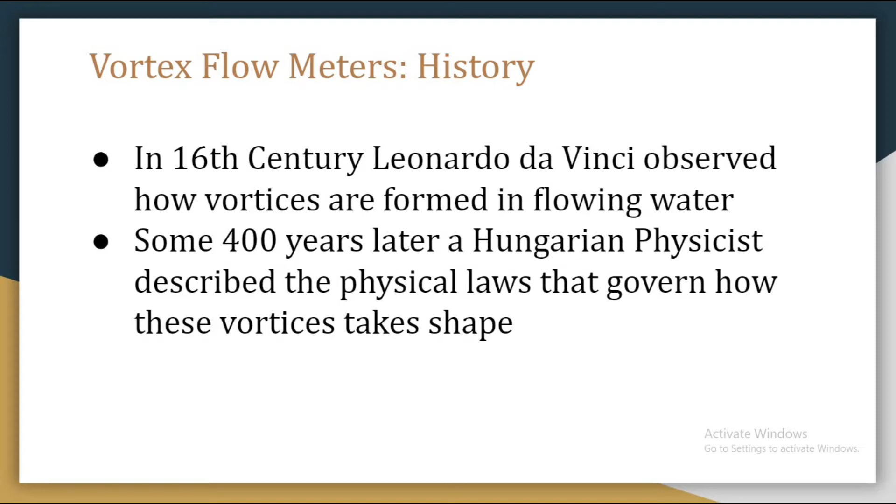Now let me discuss the very important part of this lecture, which is the working of vortex flow meters, right? Inside every vortex flow meter, there are bluff bodies located in the middle of the pipe. This body is a kind of obstruction that disturbs the flow. Okay? At first, let me show you the bluff body in the diagram.

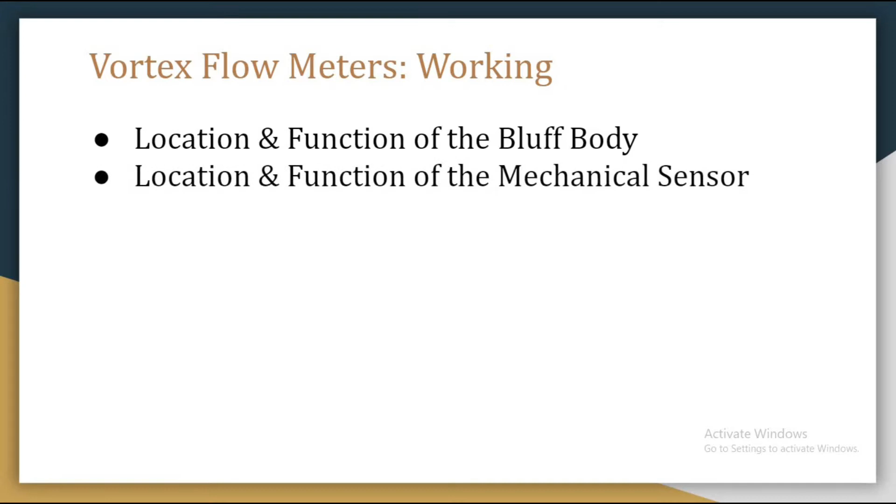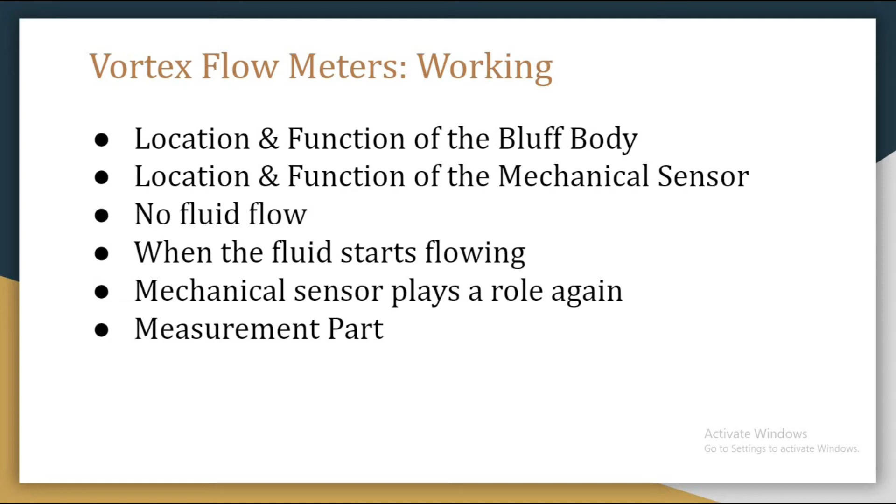We got the distance. Now, therefore, the total volumetric flow rate can be measured by counting the number of vortices that pass. Okay, the higher the flow velocity, the higher the measured frequency of the vortices. Now we have to be familiar with the problem encountered here and the solution proposed to mitigate this problem. The problem encountered is that in some applications the velocity is too low for perceptible vortices to form.

Okay, now we have to look for the enhancement in functionality. Functionality can be enhanced by incorporating an optional temperature measurement into the sensor.

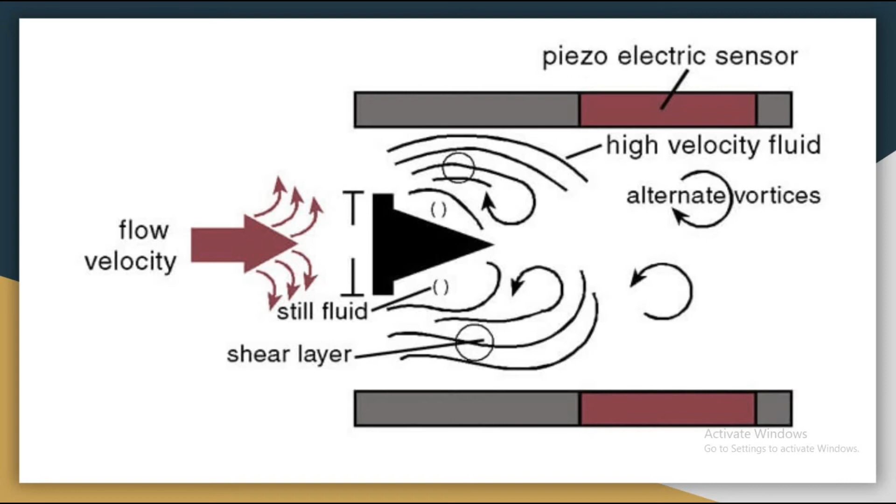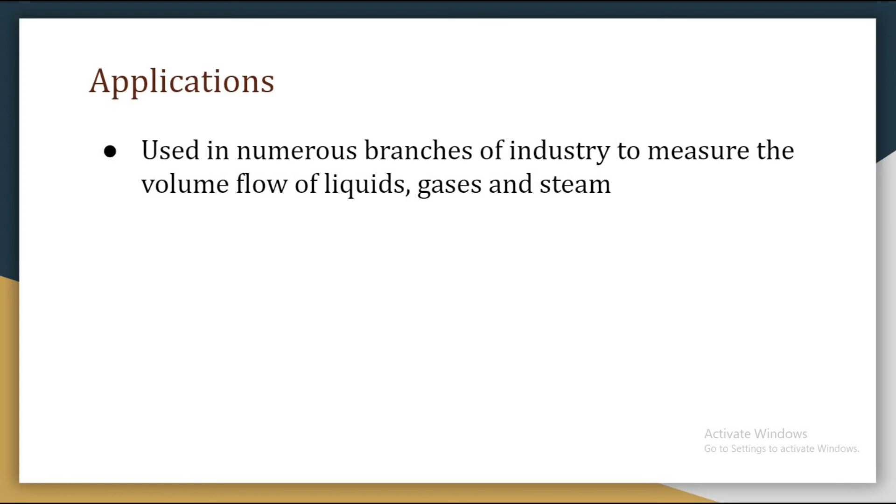So let us proceed towards the applications. Vortex flow meters are used in numerous branches of industry to measure the volume flow of liquids, gases and steam. Okay, it is used in chemical and petrochemical industries as well, and in power generation and heat supply systems.

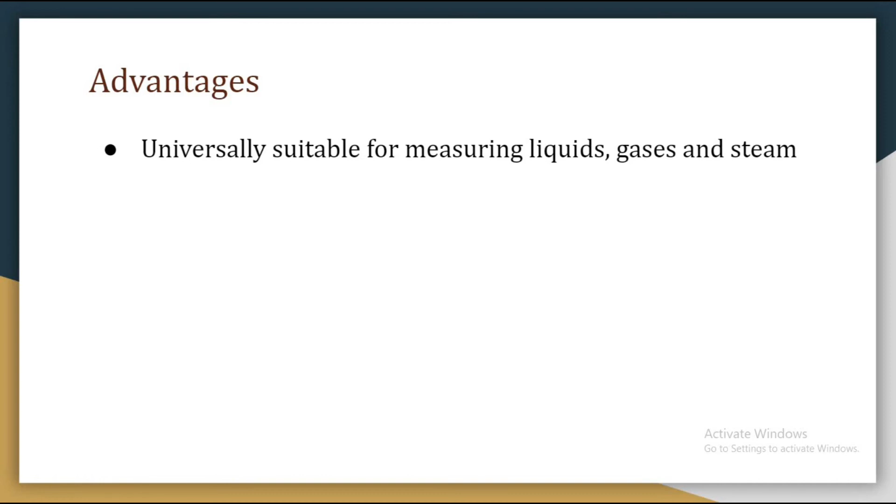Let us go through the advantages of the vortex flow meter quickly. It is universally suitable for measuring liquids, gases and steam, as I said. It is largely unaffected by changes in pressure, density, temperature and viscosity. Very important point. It has long-term stability and a wide temperature range, from -200 degrees C to +400 degrees C. It has a wide range of sizes and, obviously, linear output.

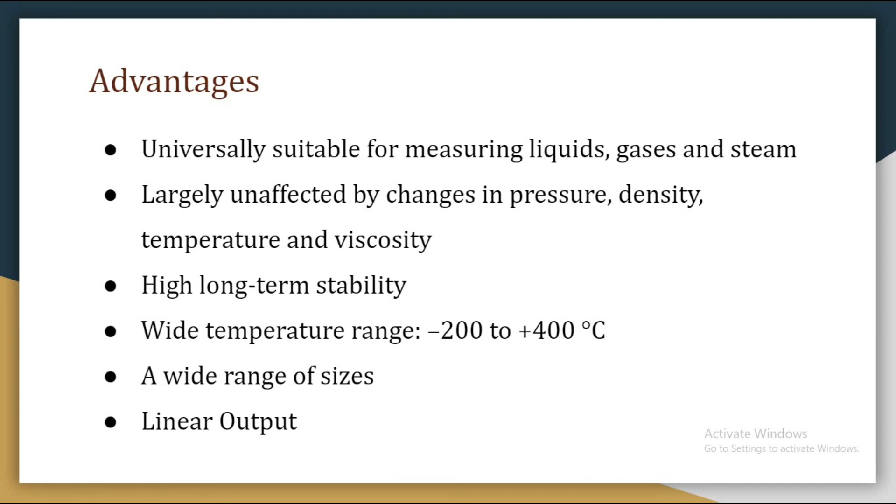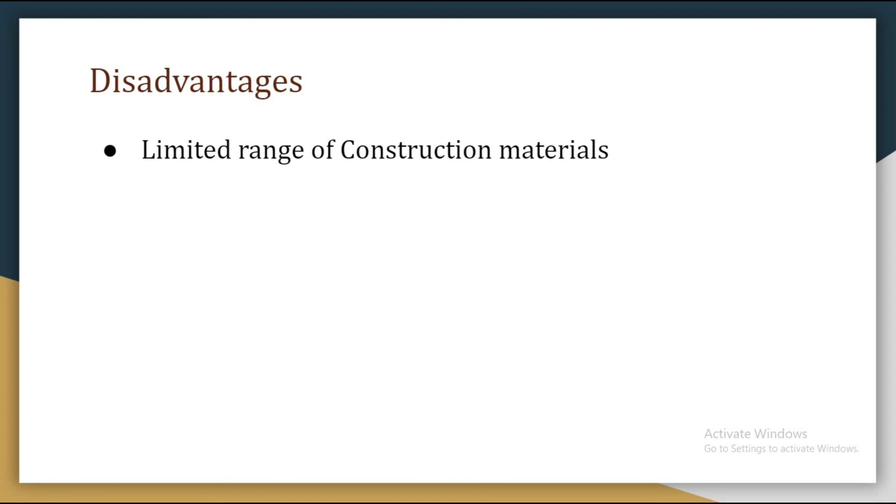Let us quickly go through the disadvantages. It has a limited range of construction materials. We cannot make a vortex flow meter from all materials. Okay, we have to be very choosy about the materials with which we construct our vortex flow meter. A vortex flow meter is not suitable for slurries or high viscosity liquids.

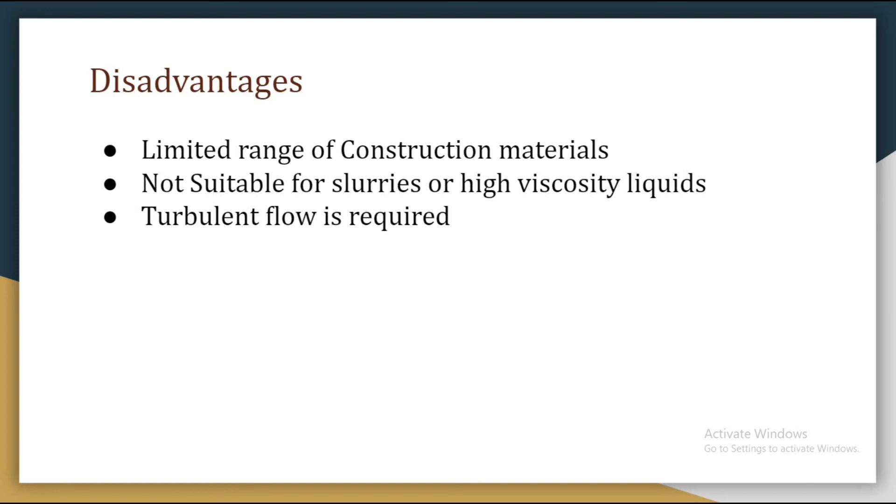I hope you guys remember that the electromagnetic flow meter was suitable for slurries, right? In an electromagnetic flow meter, it didn't matter if the flow was laminar or turbulent, but in the case of a vortex flow meter, turbulent flow is required. The vortex flow meter is also affected by pulsating flow. So that is all about the vortex flow meter from my side. Okay, so in the next lecture I will teach you about the ultrasonic flow meter.